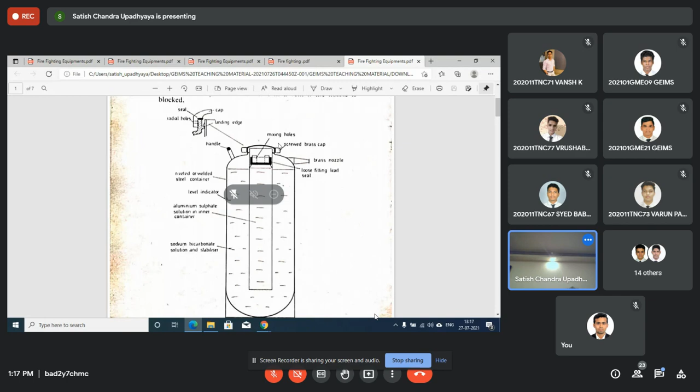You can read this. Construction. 9-liter foam fire extinguishers. Just go through.

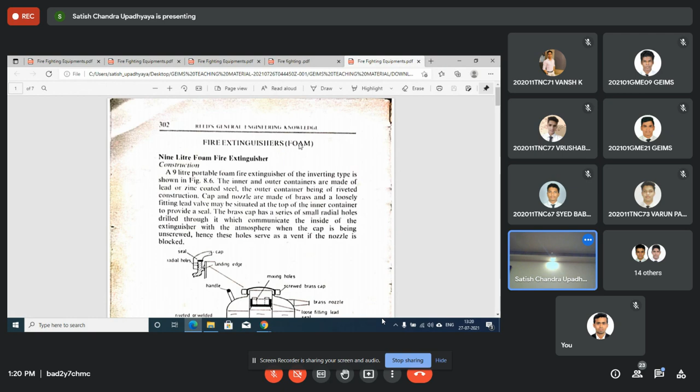This is usually in the engine room because oil fire is there. Okay. So that is why. And you can see this. You draw this, then I'll explain.

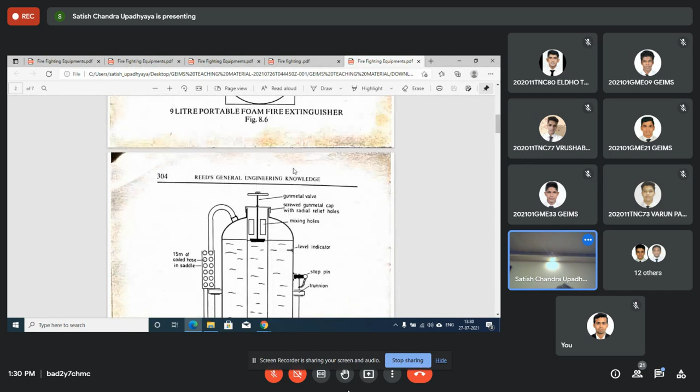Now we read about this. Pressing. When the head assembly is screwed into the neck ring, it presses down on the thick rubber washer and flange on the charge container, thus providing seal and securing the charge container in place.

The nozzle, made of aluminum alloy with fin protected air holes, is connected to the reinforced hose 1 meter in length. The hose is coupled to the brass elbow coupling, which is soldered to the stainless steel dip tube.

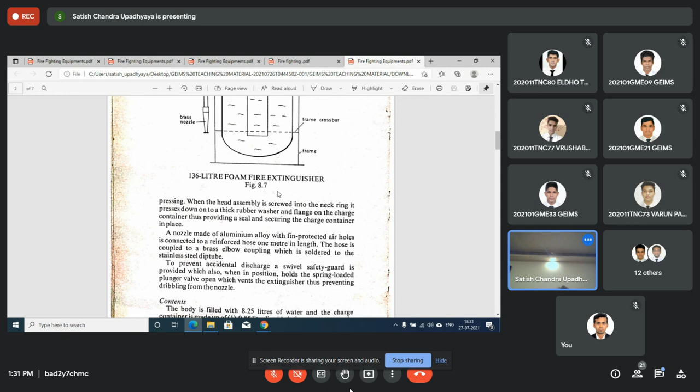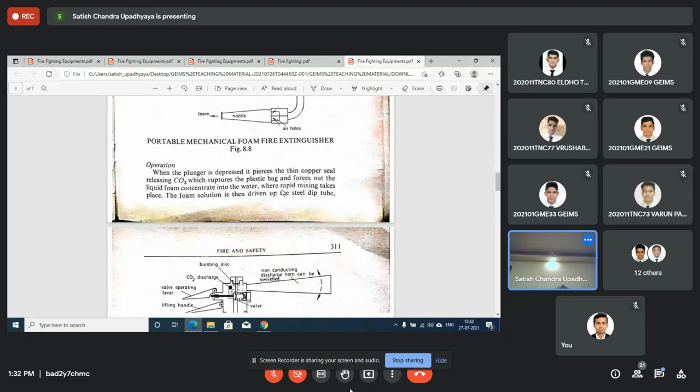To prevent accidental discharge, a swivel safety guard is provided, which also, when in position, holds the spring-loaded plunger valve open, thus preventing the dribbling from the nozzle. This was about the 9-liter portable mechanical foam fire extinguisher, which we talked about.

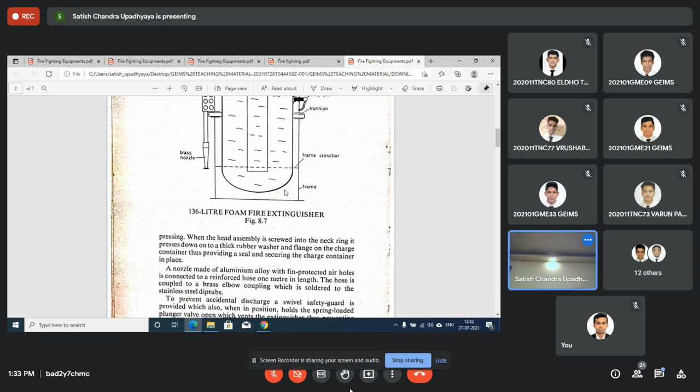Now about 136-liter foam. This fire extinguisher is similar to the 9-liter type, apart from the screwed down valve, hose and frame. To operate, the hose is uncoiled, valve opened, stop pin removed, and the extinguisher is pivoted until it rests on the crossbar. This causes the two solutions to mix and generate foam.

The performance figures: foam generated is 1000 liters, working pressure 15 bar, that is 1.5 meganewtons per meter square. Testing pressure is 25 bars, 2.5 meganewtons per meter square. Length of the jet is 18 meters. Duration of discharge is 15 minutes approximately.

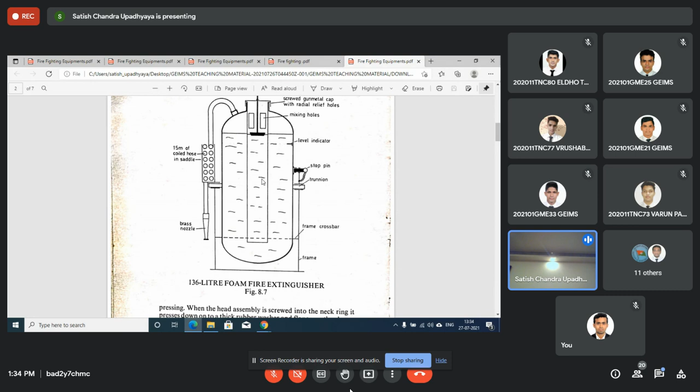Okay. And testing. In order to test the extinguisher contents, 5 ml of acid solution should be mixed with 15 ml of alkali solution in a graduated vessel, and this should produce about 160 ml of foam. Testing should be carried out about every 4 months with a thorough inspection and test every 12 months. So this is about the 136 liters.

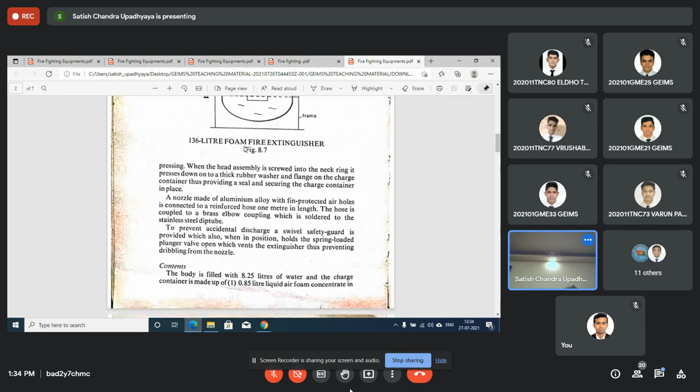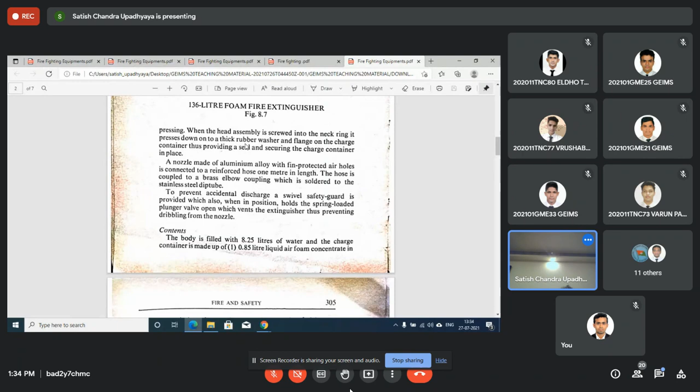Now let us talk about portable mechanical foam fire extinguishers. You draw it. You have the CO2 capsule, safety guards, plunger, handle, head assembly, joint, vent valves, foam solution in plastic bag, water, then dip tube, hose, air holes, nozzles. Portable mechanical foam fire extinguishers, okay?

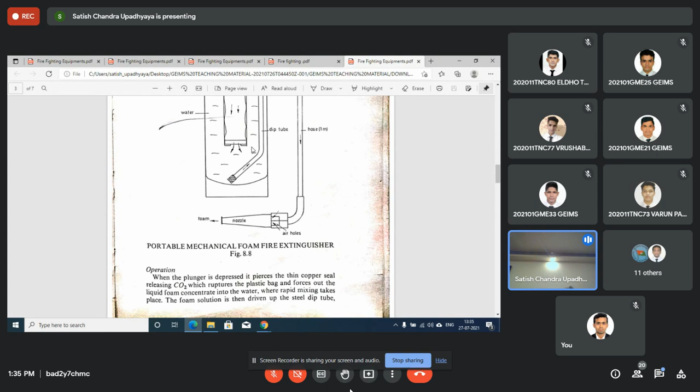So you draw this portable mechanical foam fire extinguisher, okay? Then we'll talk about this.

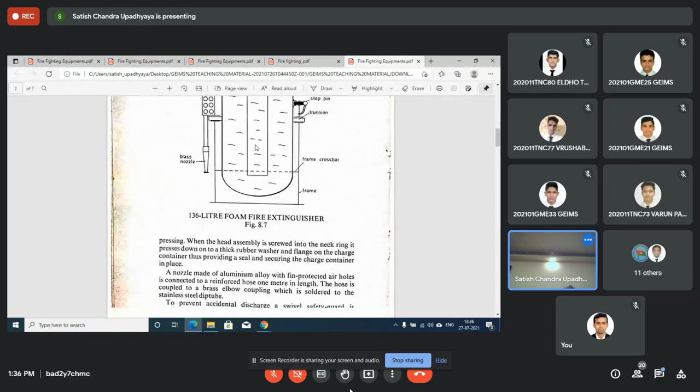See, the body is filled with 8.25 liters of water, and the charge container is made up of 0.85 liter air foam concentrate in sealed plastic, and a 0.074 kg capsule of CO2 at a pressure of 53 bars, both of which are contained in an aluminum alloy tube. So you can see this.

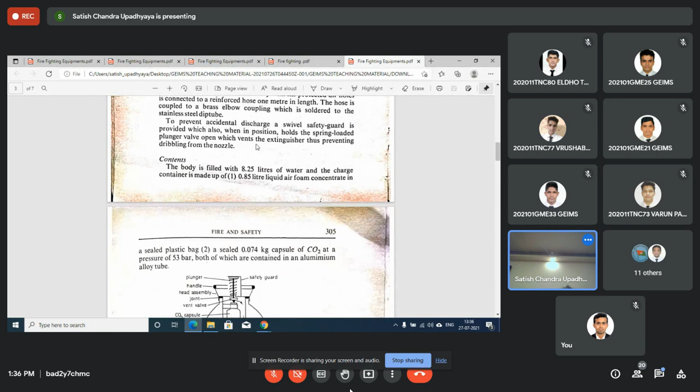The body is filled with 8.25 liters of water. You can see it here. And the foam solution in plastic bag.

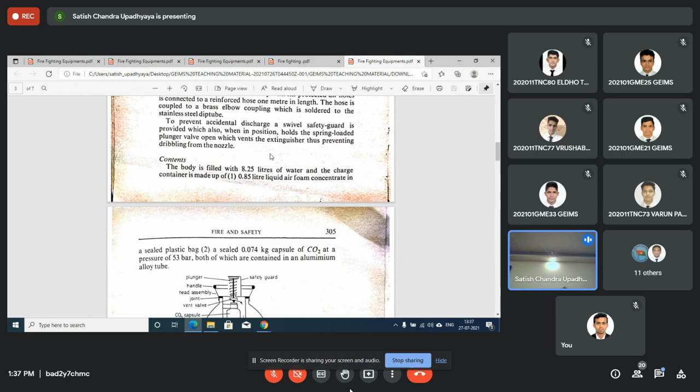The body is filled with 8.25 liters of water, and the charge container is made of 0.85 liters of air foam concentrate in sealed plastic bag, and a sealed 0.074 kg capsule of CO2 at a pressure of 53 bars. You can see both of which are contained in aluminum alloy tube.

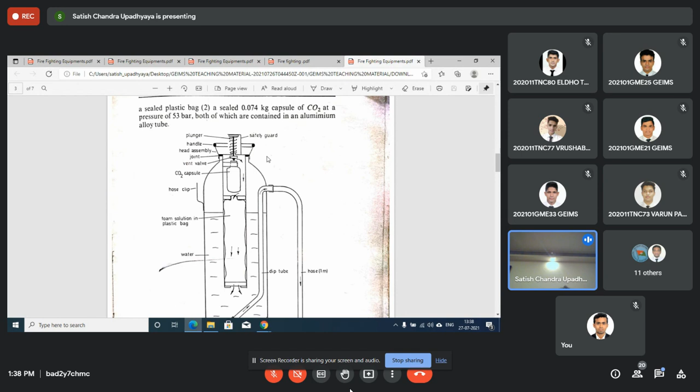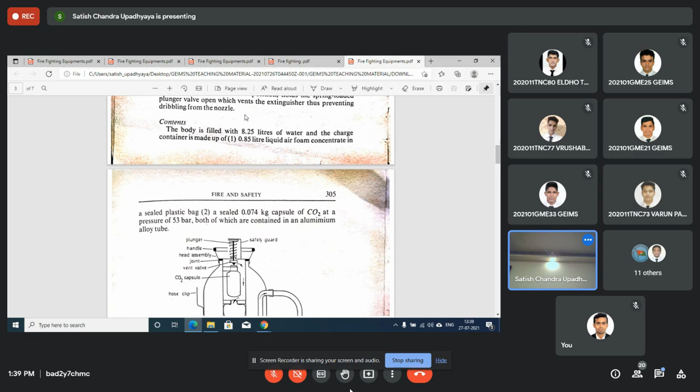You can see here, foam solution plastic bag down, then on top of this CO2 capsule. You can very well see this vent valve, joint, head assembly, handle, plunger, safety guard, and then dip tube is there, nozzle, foam, air holes. Okay, so all these things are well explained here. You can draw it also.

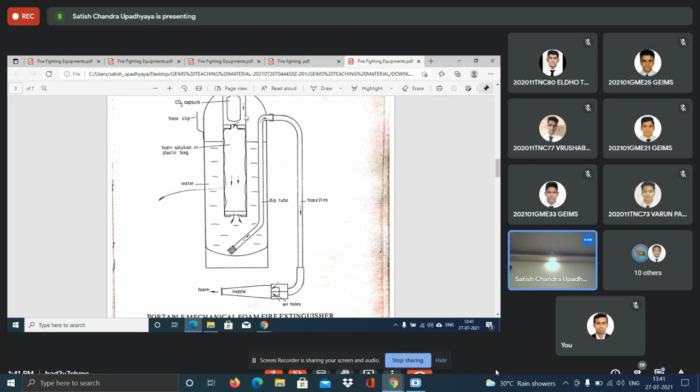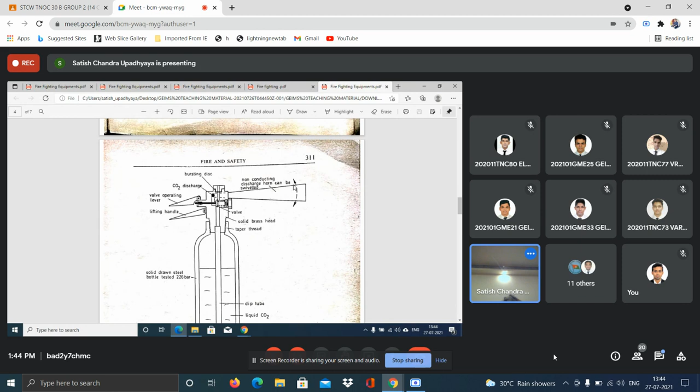Then you can see this portable mechanical foam extinguisher. When the plunger is depressed, it pierces the thin copper seal and releases CO2, which ruptures the plastic bags and forces out the liquid foam concentrate into the water, where rapid mixing takes place, and the foam solution is then driven up through the steel dip tube. So this is about this. Okay.

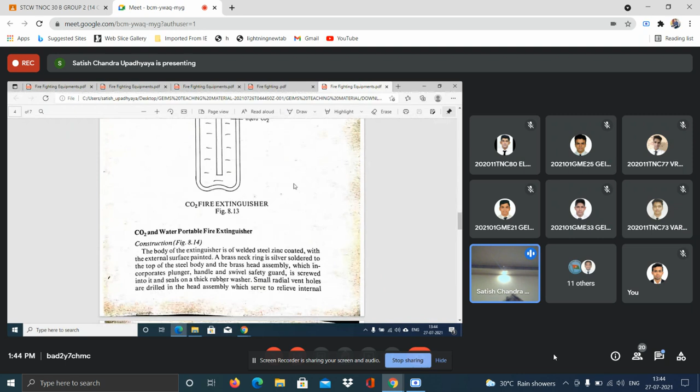Now the CO2 fire extinguisher, just see this. Just see the diagram. Draw it.

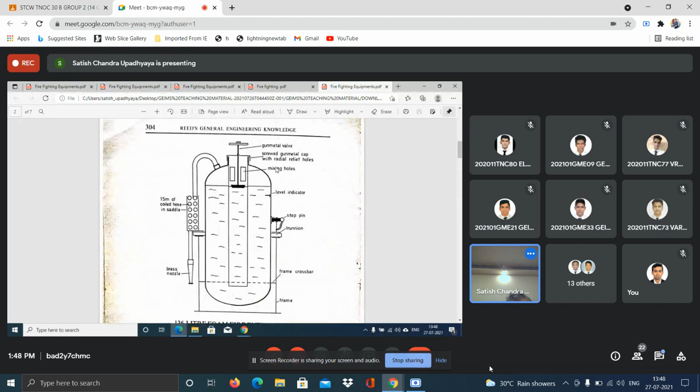So you can see here the bursting disc, CO2 discharge, and the valve operating levers. You can just press this lift handle, and the solid brass head, taper and valve are also there. The non-conducting discharge horn can be swiveled, and the solid drawn steel bottle is tested to 226 bar. The dip tube and liquid CO2 are inside.

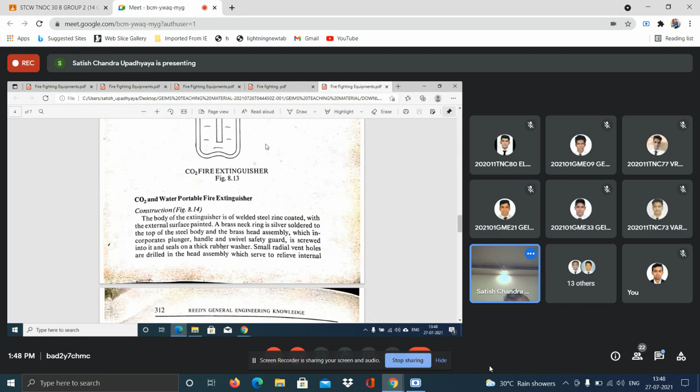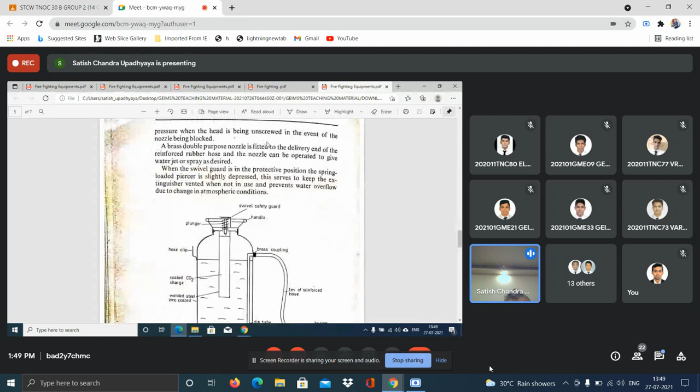Then you can see this CO2 and water portable fire extinguisher. The swivel safety guard is there, you can see here the handle, plunger, hose clip, sealed CO2, welded steel zinc coated body, 9-liter water, dip tube, brass coupling, 1 meter reinforced hose, button, and double nozzle. This is the CO2 and water portable fire extinguisher. You can read, you can go through this.

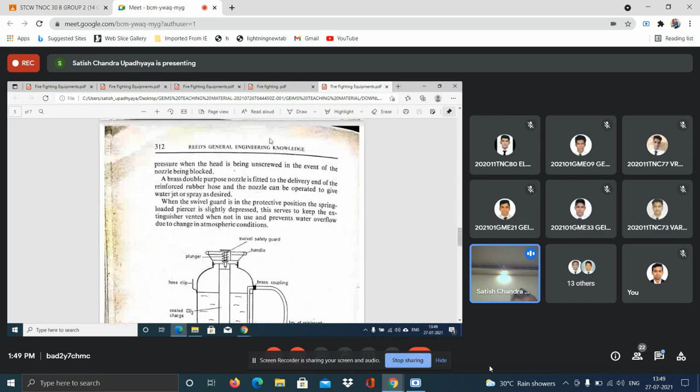Construction of this: the body of the extinguisher is of welded steel, zinc coated, and the external surface painted. The brass neck ring is silver soldered to the top of the steel body, and the brass head assembly, which incorporates the plunger, handle and swivel safety guard, is screwed into it and seals on the thick rubber washer. Small radial vent holes are drilled in the head assembly, which serve to relieve the internal pressure when the head is being unscrewed in the event of the nozzle being blocked.

The brass double-purpose nozzle is fitted to the delivery end of the reinforced rubber hose, and the nozzle can be operated to give a water jet or spray as desired. When the swivel guard is in the protective position, the spring-loaded piercer is slightly depressed. This helps to keep the extinguisher vented when not in use and prevents water overflow due to changes in atmospheric pressure conditions. So this is all about this.

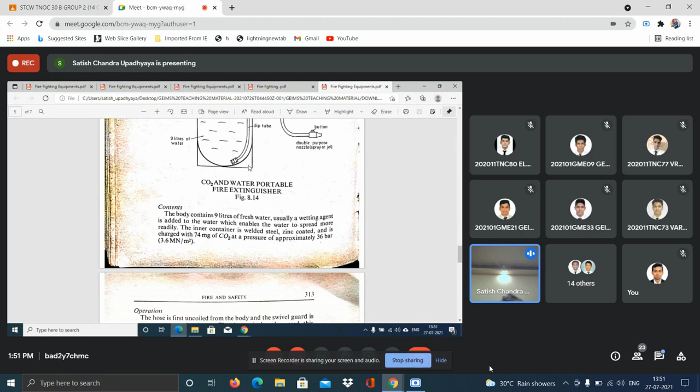Here also you can see the body contains 9 liters of fresh water, usually with a wetting agent added to the water, which enables the water to spread more readily. The inner container is of welded steel, zinc coated, and is charged with 74 grams of CO2 at a pressure of approximately 36 bars, 3.6 meganewtons per square metre. So quite a lot of pressure.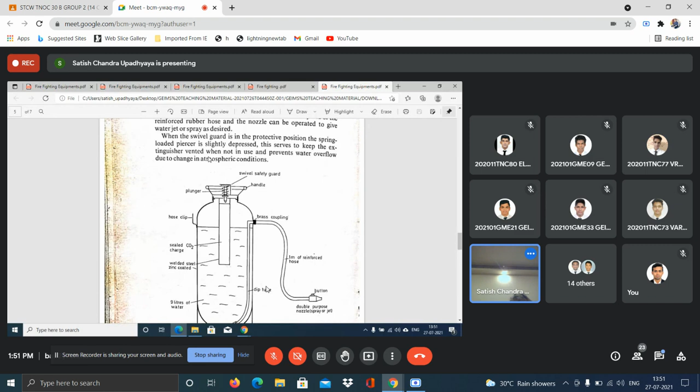Operation: the hose is first uncoiled from the body and the swivel guard is swung to uncover the plunger. The plunger is then depressed. This releases CO2, which then drives the water out via the dip tube and hose. Performance: length of the jet is 10.6 meters approximately. Spray is 6.06 meters, about 36 square meters of cover. Duration of discharge is approximately 60 seconds. Body tested hydraulically to 25 bars.

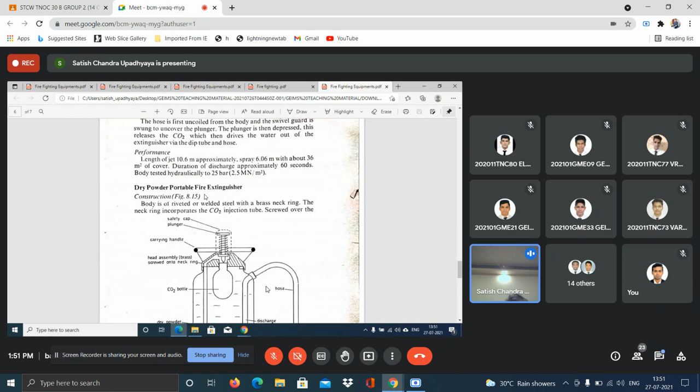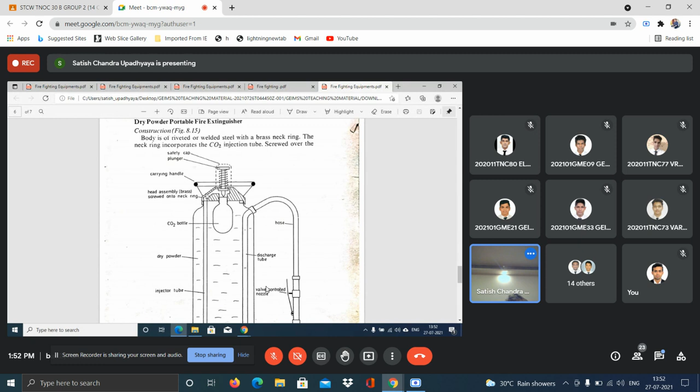Okay, then the dry powder portable fire extinguisher you can see here. The body is riveted or welded steel. You can see this diagram first. You can see the carrying handle, safety cap, and plunger. First remove the safety cap, then plunge it. CO2 bottle. You have the dry powder inside and then the tube is there. The CO2 goes there and drives it out by hose, discharge tubes, valves, nozzle, and other things. Dry powder fire extinguisher. So this is it.

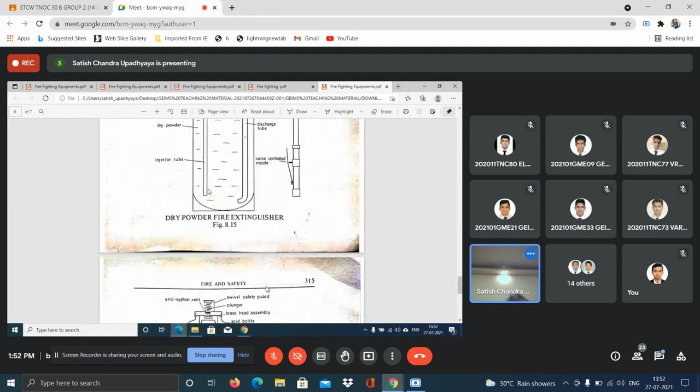So all this, I think, covers the portable fire extinguishers. That is all I wanted to say about this.